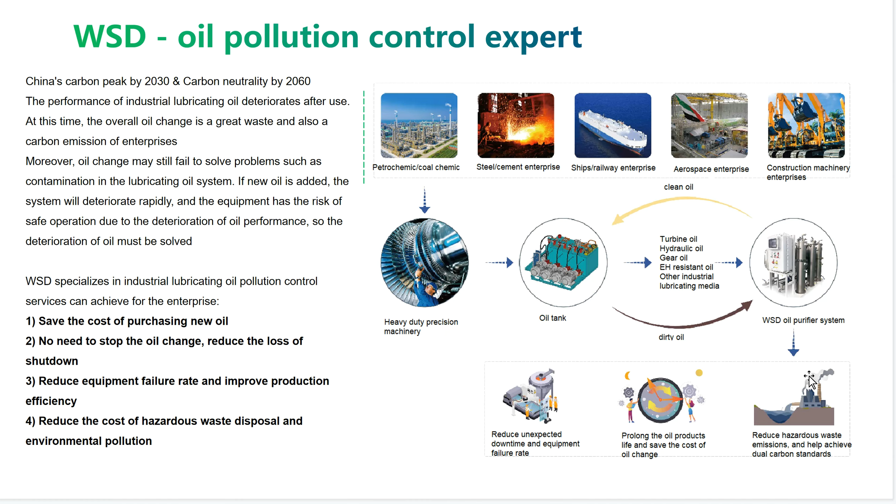First, let's see the formation and hazards of varnish. What is varnish? Varnish is a kind of coalescence, a kind of lubricating oil or hydraulic oil aging after composite oxidation at high temperature and high pressure. This is common in high-speed rotating machinery in lubrication and hydraulic systems.

These are varnish pictures: bearing bush, varnish on compressor gearbox, varnish on the tank wall. Initially, the surface is gold tawny, but over time, the surface is gradually covered with a darker rubbery coating, which eventually becomes a hard, paint-like substance.

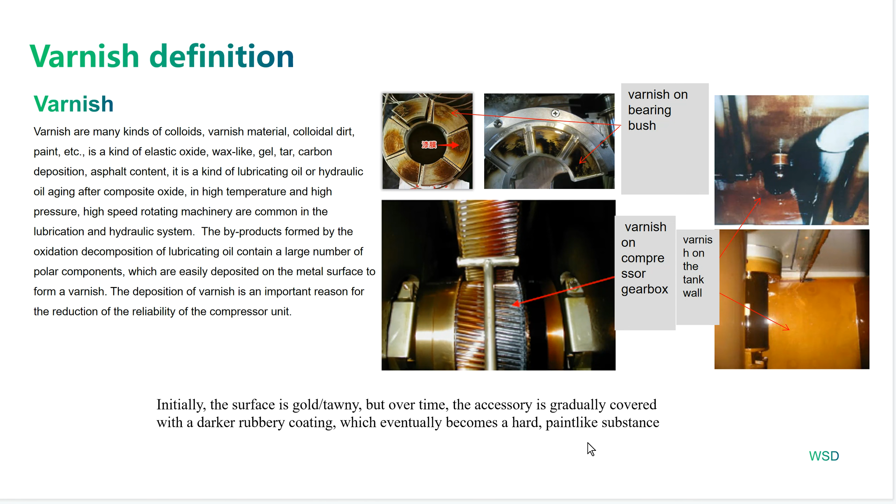Why is varnish easily formed in compressors? Because the operational environment is harsh and a hot spot effect is formed on the metal surface. Number 2 and 3 base oil alternative: number 1 class base oil, though thermal stability and oxidation stability, improves their solubility, and the oil microcombustion causes varnish formation.

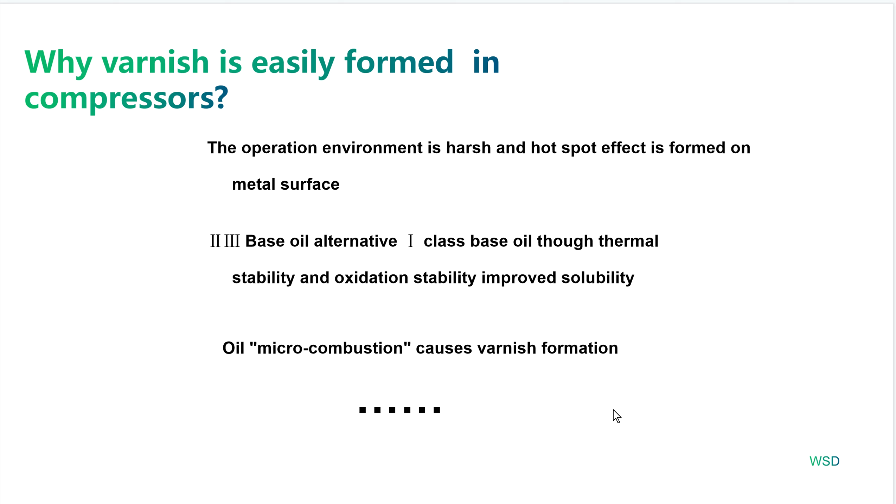Varnish has a feature of reversibility. The solubility of varnish will change with temperature. When the temperature is high, the ability of varnish to dissolve increases with the rise of oil temperature, and the varnish exists in the oil in a dissolved state, so the oil is transparent. When the temperature decreases, varnish dissolve ability becomes worse, and the varnish exists in the oil in a suspended state, so the oil becomes turbid.

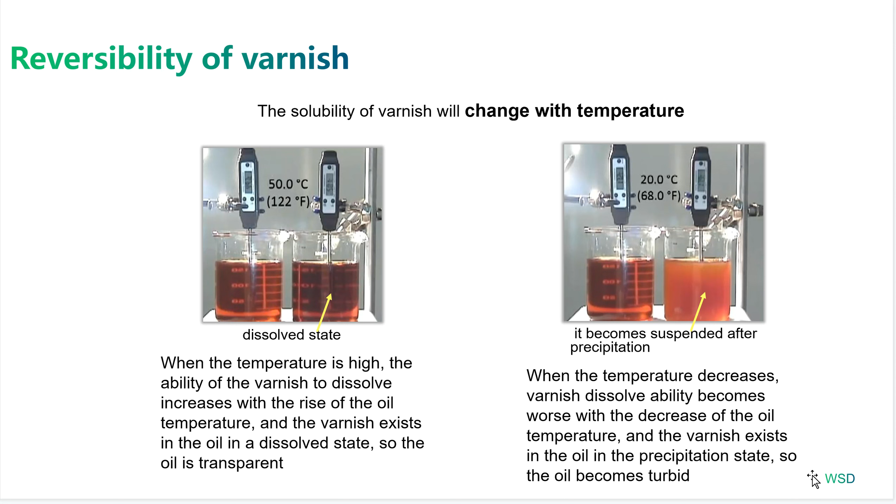Dissolved varnish and precipitated varnish, these two states will change with temperature. Separate charge adsorption technology cannot solve the dissolved varnish, and the unit will always be in uncontrollable risk.

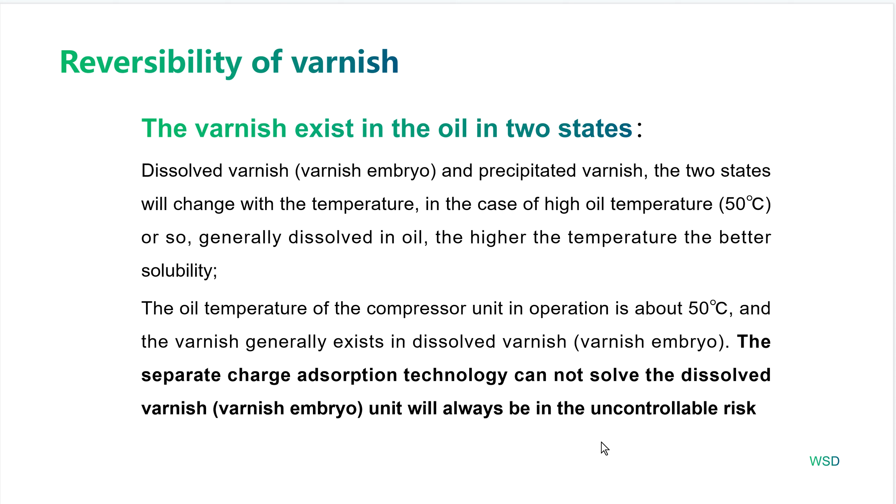The third picture is the filter. When the filter has varnish covering it, the filter's performance will be reduced, and you will need to change the filter in a short time. The number 4 is the cooler. When the cooler has varnish on it, the cooler's performance will be reduced.

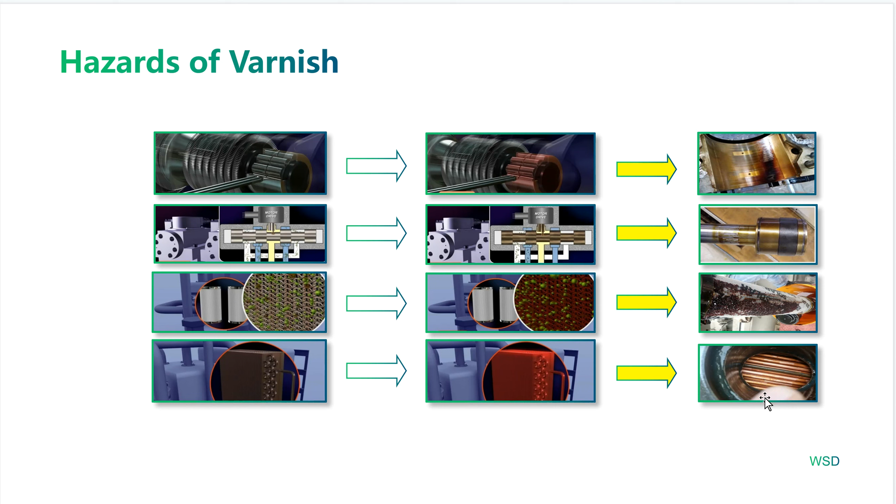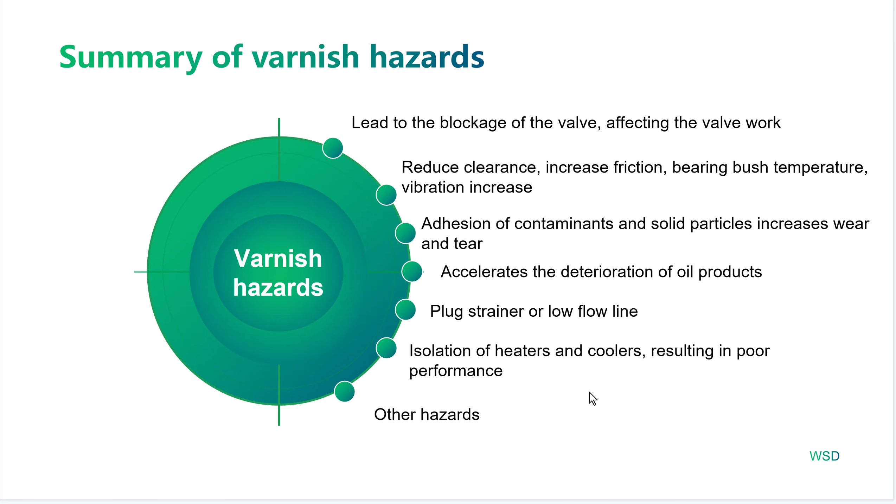Here is a summary of varnish hazards: leads to blockage of the valve, affects valve work, reduces clearance, increases friction, bearing bush temperature and vibration increase, adhesion of contaminants and solid particles increases wear and tear, accelerates deterioration of oil products, plugs strainer or flow line, isolation of heaters and coolers, resulting in poor performance.

Here is the testing for varnish. It's from ASTM D7843. This is a kind of colorimetric method.

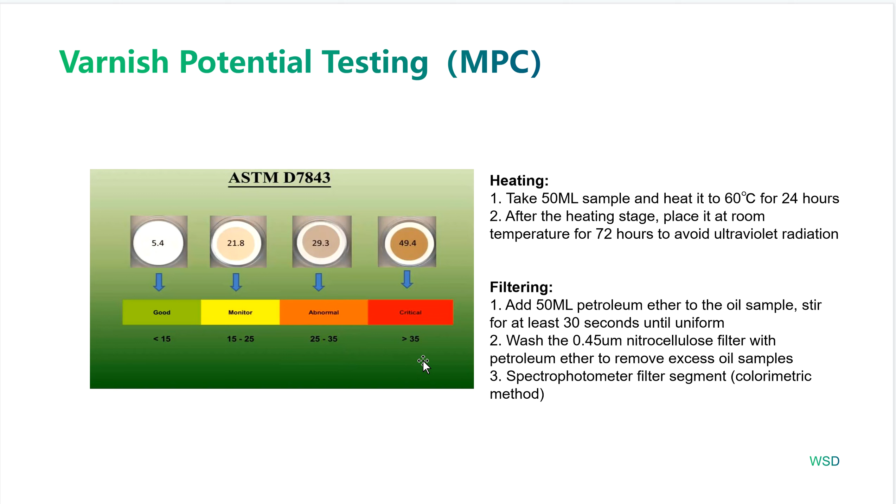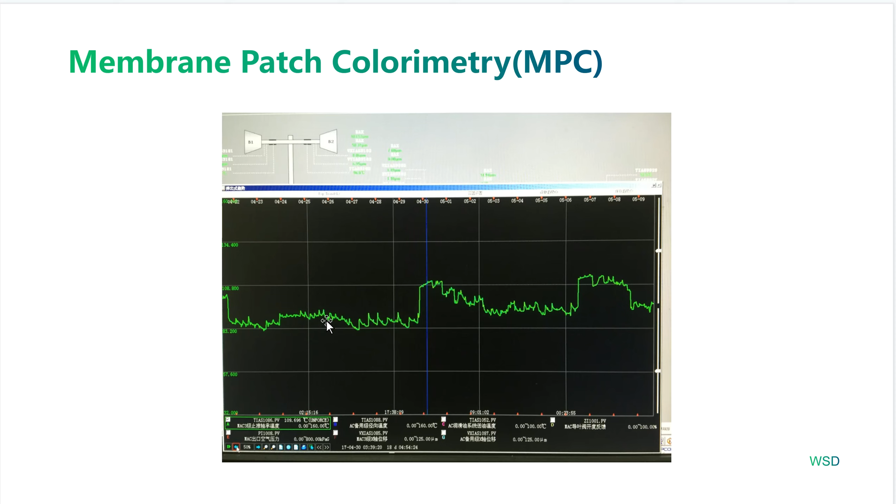These are the 4 different situations of varnish: when it's less than 15, it means it's good; when it's 15 to 25, it means the system needs to be monitored; when the MPC is 25 to 35, it means it's already abnormal; when it's more than 35, it means it's critical. When the rotating equipment has varnish, the temperature will fluctuate.

Number 2, we are going to introduce the varnish remover equipment, to monitor and detect lubricating oil varnish exists in the system.

This chart: the x-axis is the equipment running hours, and the y-axis is the varnish level. Turbine machine A and turbine machine B: turbine machine A has a serious varnish problem, so there are a few times it had shutdowns. But turbine machine B has very few varnish issues, so there is no shutdown for turbine machine B.

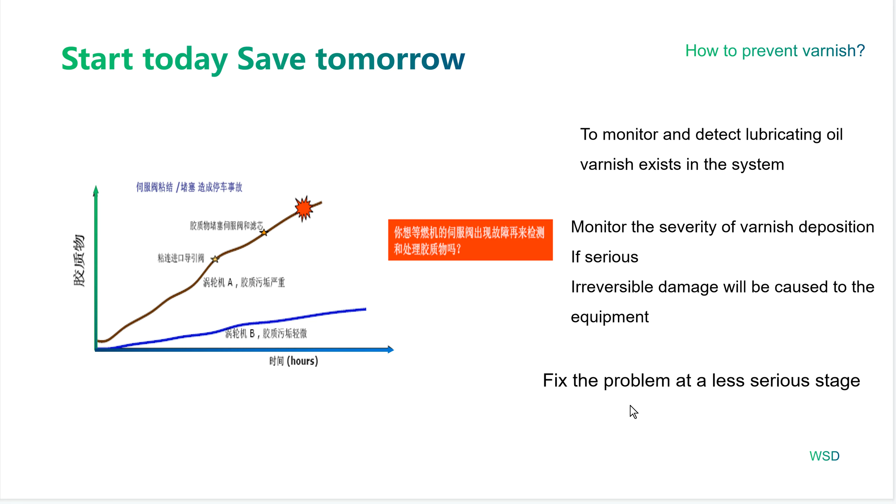So we have to fix the problem at the less serious stage. How do we deal with the varnish? We use electrostatic adsorption technology to remove suspended varnish.

Electrostatic adsorption technology makes use of circular high voltage electrostatic field to make pollutant particles in oil show positive and negative charges respectively. Under the action of electric field force, the positively and negatively charged particles swim towards the negative and positive electrodes respectively. Neutral particles are moved by a stream of charged particles. Finally, all particles are adsorbed on the collector, completing removal of contaminants from the oil.

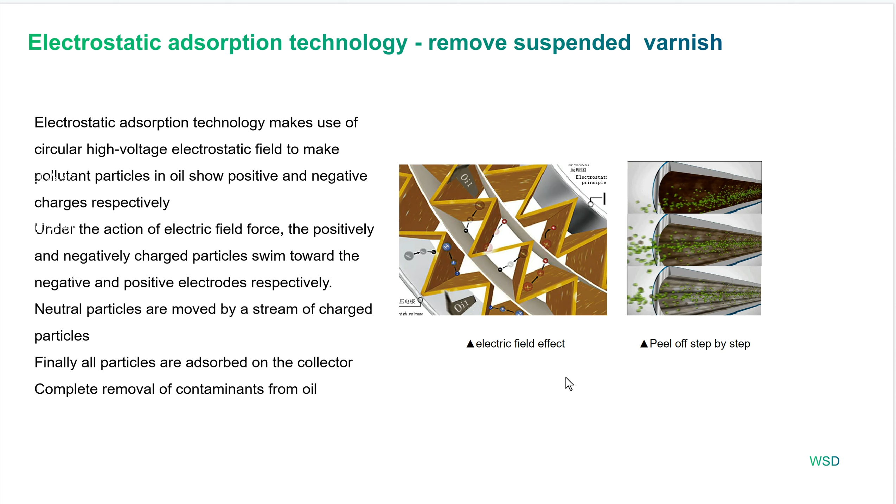And we use ion exchange resins to remove dissolved varnish. Using the abundant basic groups on the adsorption material, it can well adsorb all kinds of substances with acidic groups. The specially formulated resin gives the varnish embryo high affinity to the filter medium, so as to have a high removal rate of degraded products.

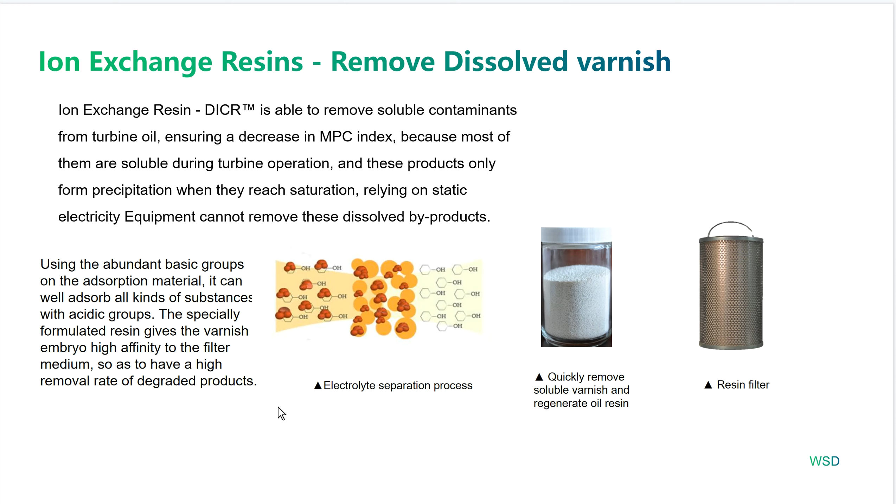Combine electrostatic adsorption technology and the ion exchange resin, we can not only effectively remove suspended varnish, but also remove the dissolved varnish.

Varnish has the feature of reversibility. When the accumulation of oxidation products increases, the dissolved state reaches saturation and is precipitated, suspended, and deposited as varnish. This process is reversed when the varnish is removed.

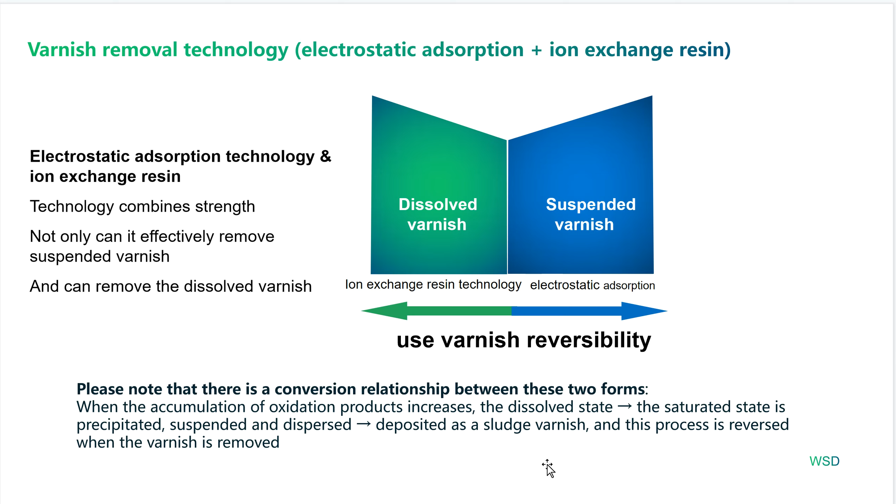What can be done when these two main technologies combine? It can reduce the MPC value to less than 15. It can peel off and remove suspended and dissolved varnish. And it can also improve cleanliness, keeping it below NAS number 5 for a long time.

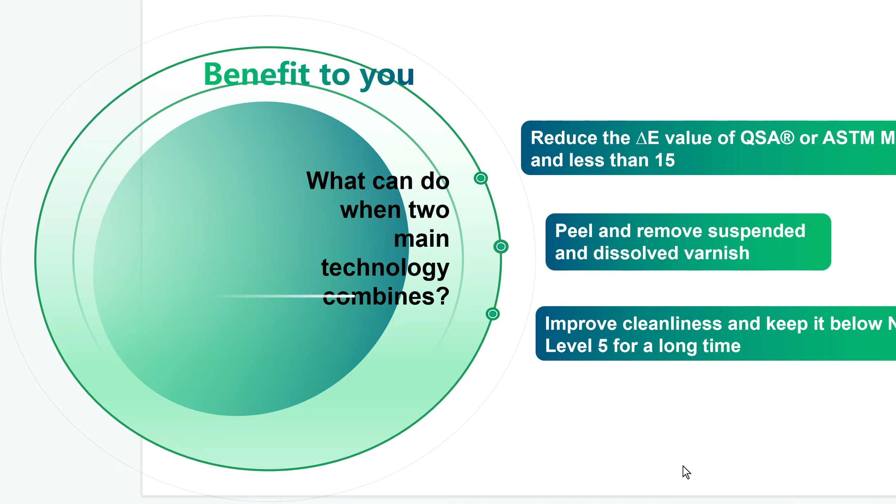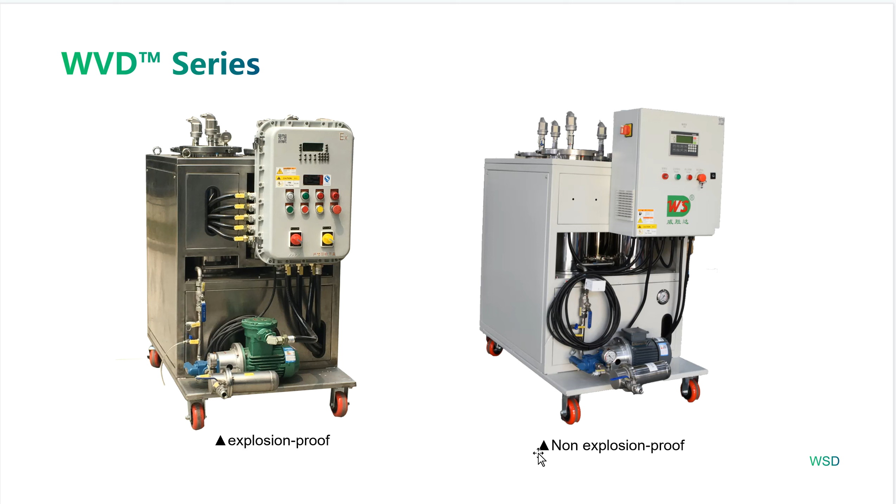Product advantages: WVD can quickly remove dissolved and suspended lubricant degradation products. It provides fast reduction and prevention of servo valve adhesion. It has a small footprint, simple and convenient operation, less maintenance, and online operation.

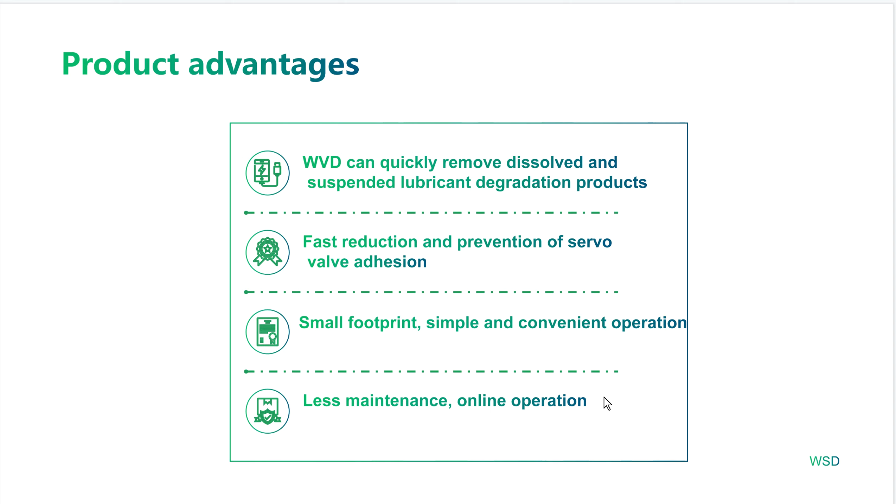Case share number 3. Case number 1 is an industrial gas group. The customer pain point: an air compressor in a Suzhou factory caused bearing temperature fluctuation due to varnish. The situation was serious, and the unit was forced to stop for maintenance.

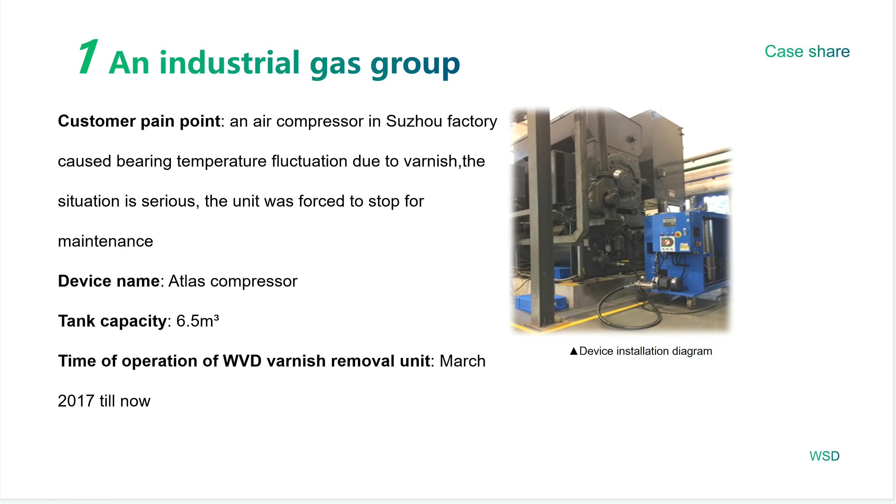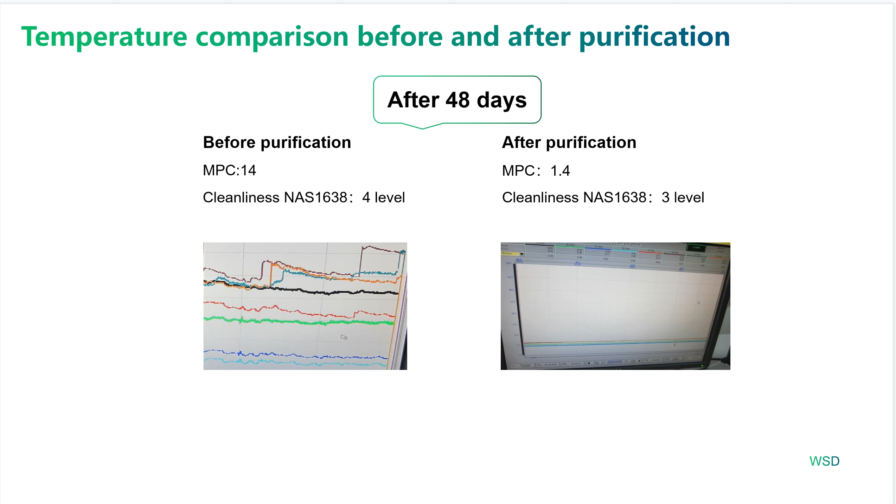Device name is Atlas compressor. Tank capacity is 6.5 cubic meters. It started to use from March 2017. After 48 days, MPC went from 14 to 1.4, and the cleanliness NAS 1638 went from 4 level to 3 level.

After 8 months of use with varnish accumulation, we can see the difference in the pictures. Before purification we can see clear varnish; after 8 months, the bearing bush is very clean.

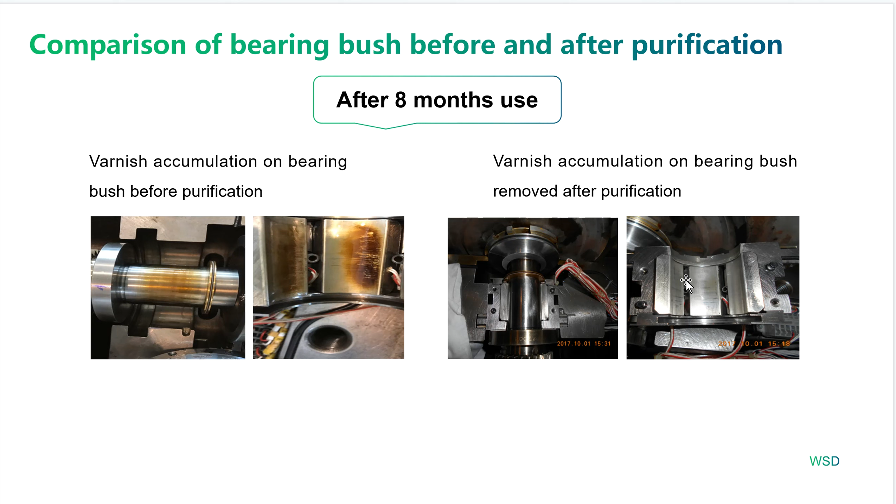Application effect in other factories of the group: after using our WVD-II varnish remover unit in Suzhou factories, the abnormal phenomenon of bearing temperature trend rising slowly also appeared in the Ningbo factory. After 30 days of using our WVD-II varnish remover unit, the abnormal phenomenon of bearing temperature was significantly improved. This is the data from the Ningbo factory, and we can see the results are also very good.

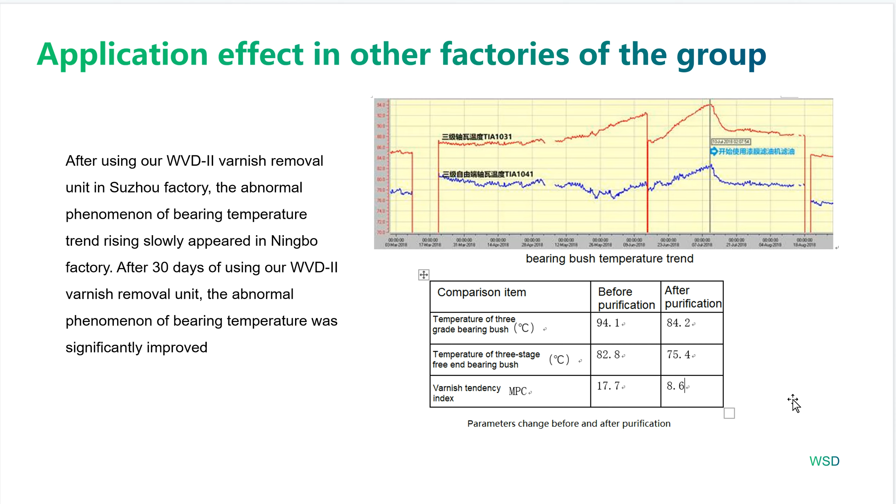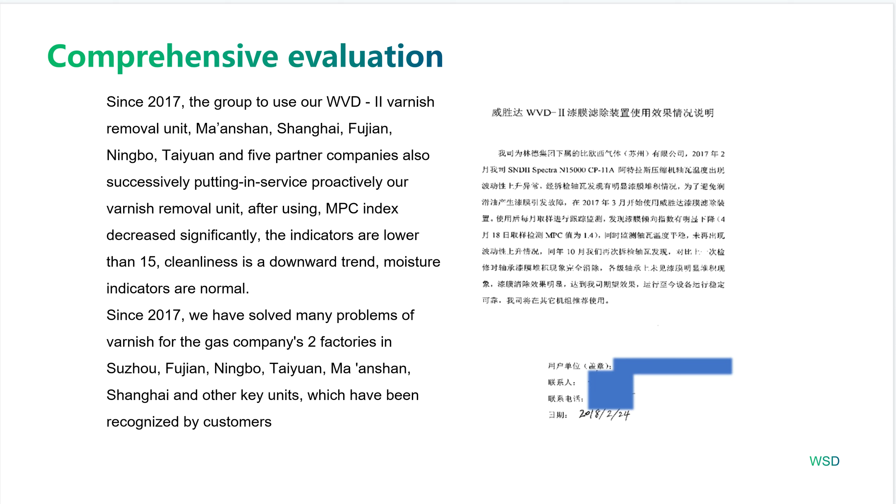Since 2017, the group has used our WVD-II varnish remover unit. The 5 partner companies in Ma'anshan, Shanghai, Fujian, Ningbo, and Taiyuan have also successively put our varnish remover unit into service proactively.

Case 2 is a large gas company. Customer pain points: the customer has a 43,000 large air separation compressor using a main turbine unit, with a thin oil station of about 48 cubic meters, using number 46 turbine oil.

MPC value was 21.2 when tested 36 months after startup, and rose to 24.8 when tested 44 months later, showing an upward trend, and there was varnish accumulation in the bearing bush during previous maintenance.

Device is a compressor, tank capacity 48 cubic meters. They started using our varnish remover unit from 2016.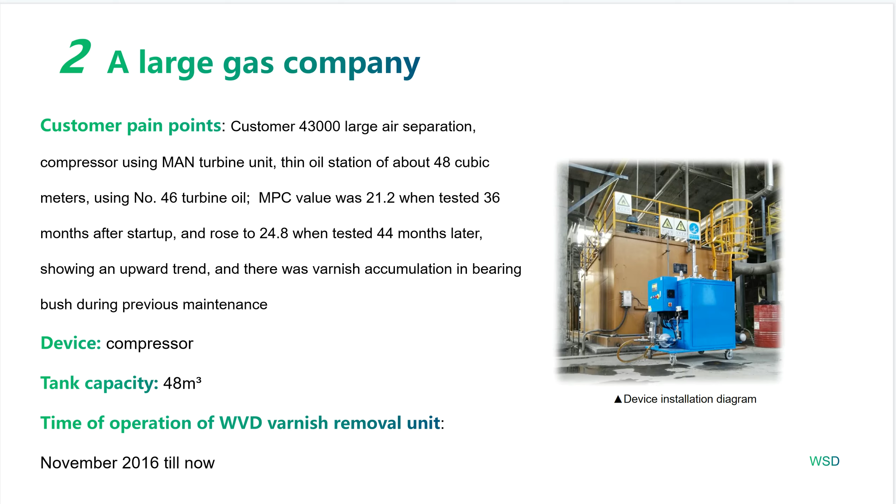Here is a chart from the customer. When the main turbine started up 23 months in, we can see the MPC is 9.5, and then the MPC is rising.

From here, when MPC reached 25, they started to use our machine, and we can see the MPC decreases in a very short time. But later, there is a rising stage.

Why? Because, as we said, varnish has the reversibility feature. MPC is testing the varnish in the dissolved state. When dissolved varnish is removed by our machine, the suspended varnish will reverse back into the oil, making the dissolved varnish increase, so MPC rises, but later MPC is reduced again.

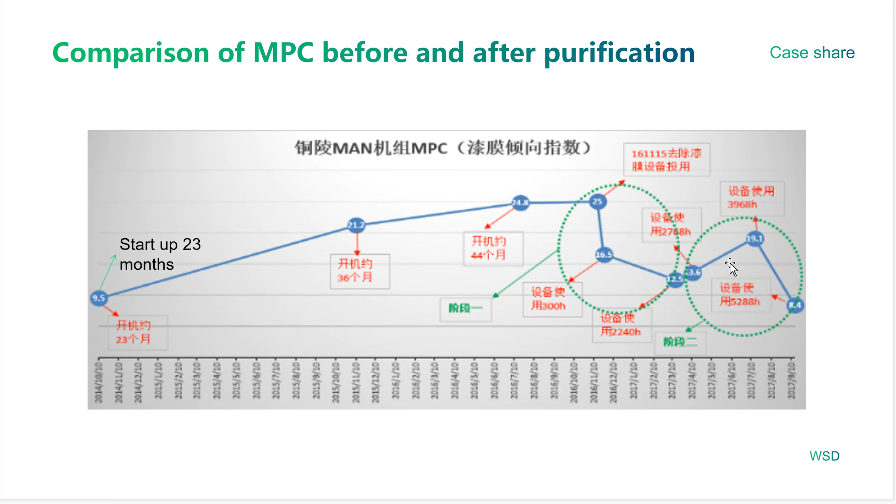So the trend is MPC up, down, up, down, up, but finally it will decrease.

Since the installation of the WVD varnish remover unit in November 2016, to October 2017 when the equipment shut down for maintenance, the varnish on the bearing bushings of the unit has been basically removed without any varnish accumulation, meeting the customer's technical requirements. Up to now, the varnish and other indicators are normal.

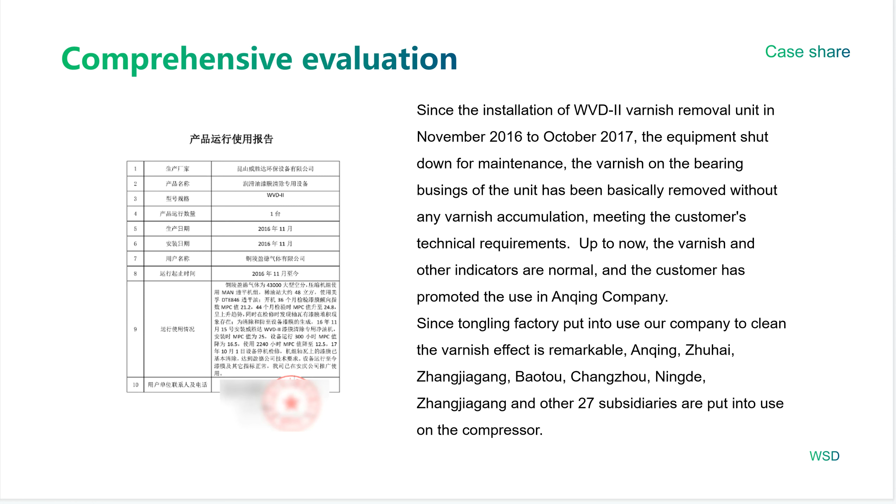The customer has promoted the use in the Anqing factory. Since the Tongling factory put it into use, our company's varnish cleaning effect has been remarkable. Other cities, 27 other subsidiaries, have also put it into use on their compressors.

Case 3 is the CNOOC company. Customer pain points: in September 2017, the bearing temperature for the supercharger slowly rose to 92 degrees, causing the risk of machine shutdown jumping.

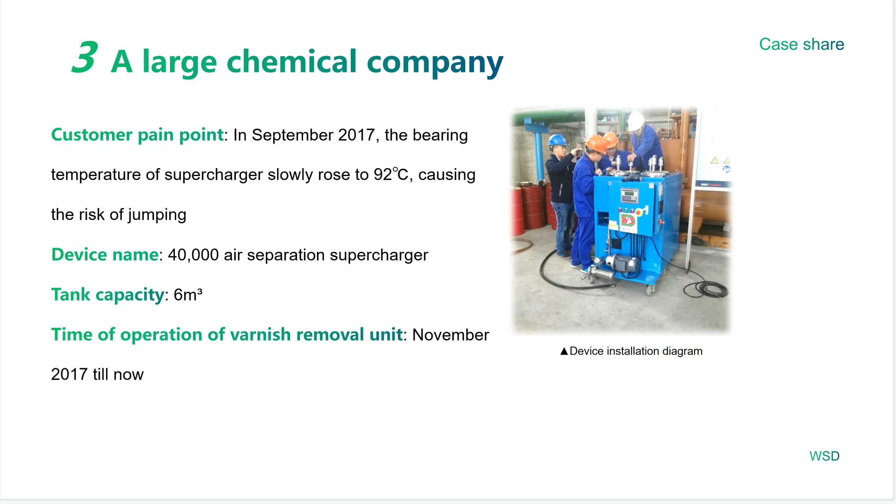Device name is the 40,000 air separation supercharger. Tank capacity is 6 cubic meters. Started to use from 2017.

Before purification: in September 2017, the bearing temperature of the supercharger rose slowly. In November 2017, the bearing temperature rose to 92 degrees.

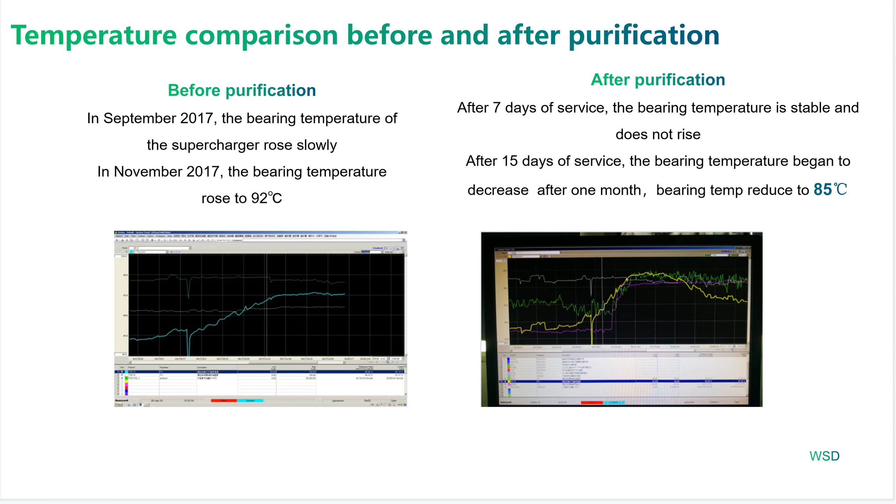After purification: after 7 days of service, the bearing temperature is stable and does not rise. After 15 days of service, the bearing temperature began to decrease after 1 month, reducing to 85 degrees.

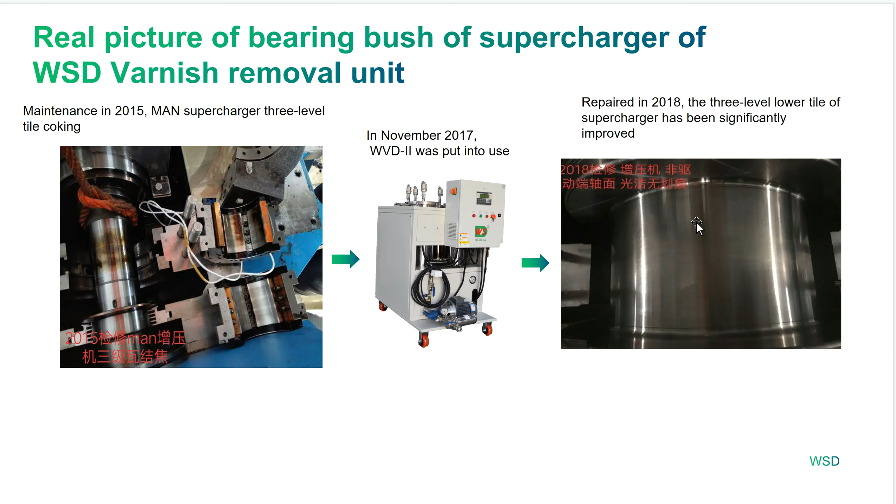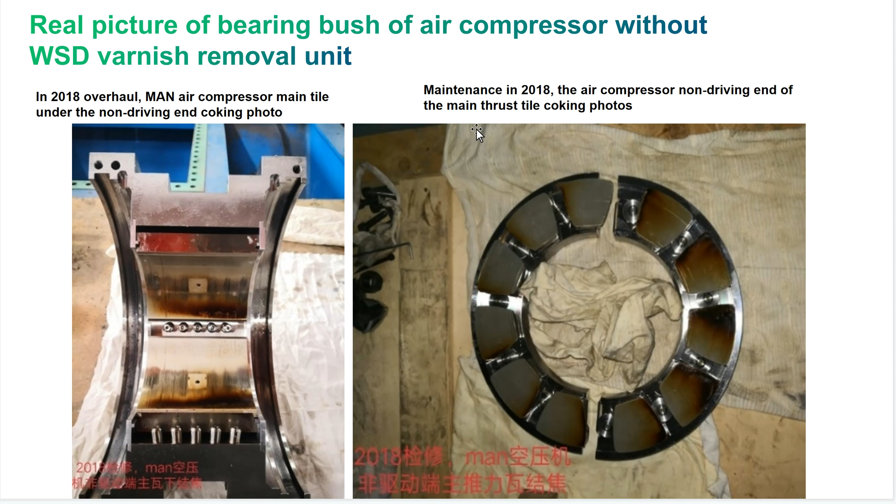In 2018 overhaul, MAN air compressor, main tile under the non-driving end coking photo. Maintenance in 2018, the air compressor non-driving end of the main thrust tile coking photos.

So from this picture we can see the difference. Supercharger.

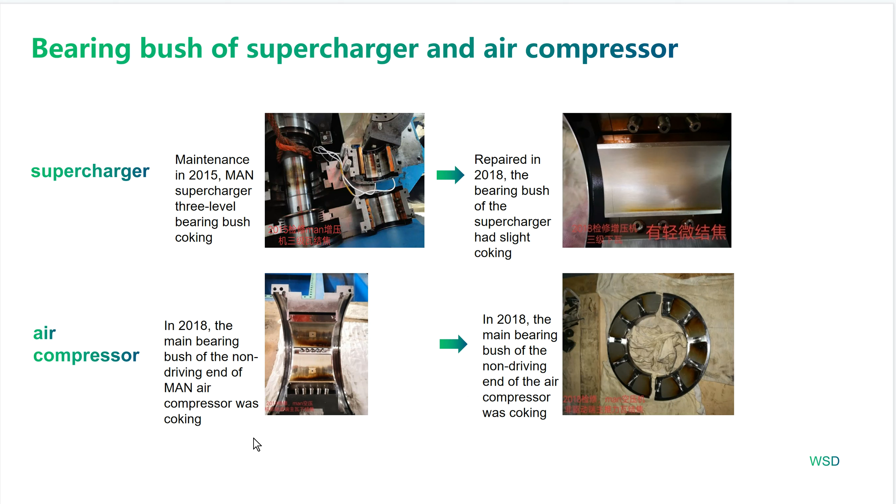Air compressor in 2018: the main bearing bush of the non-driving end of MAN air compressor was coking. In 2018, the main bearing bush of the non-driving end of the air compressor was coking. In December 2018, the customer found that the supercharger bearing varnish had been obviously removed during maintenance. Except the supercharger, other equipment doesn't use our machine.

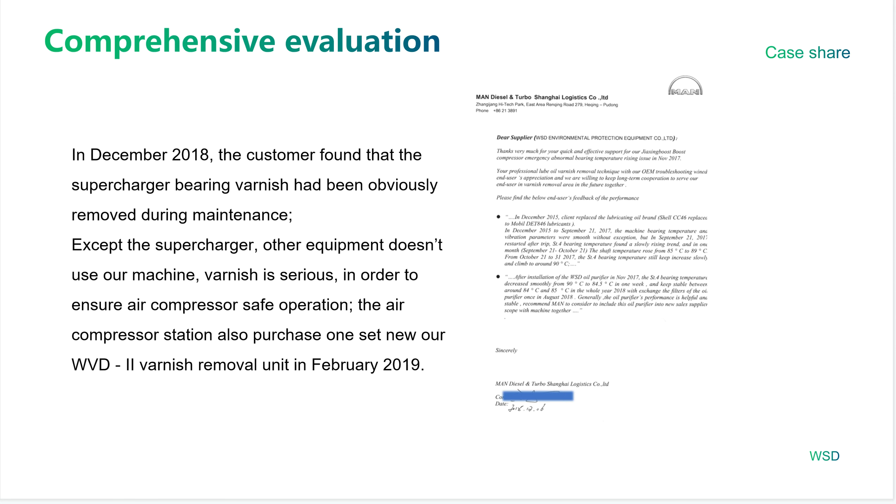Varnish is serious. In order to ensure air compressor safe operation, the air compressor station also purchased one new unit of our varnish remover in February 2019. This is a recommendation from MAN Diesel & Turbo Shanghai Logistics Limited Company.

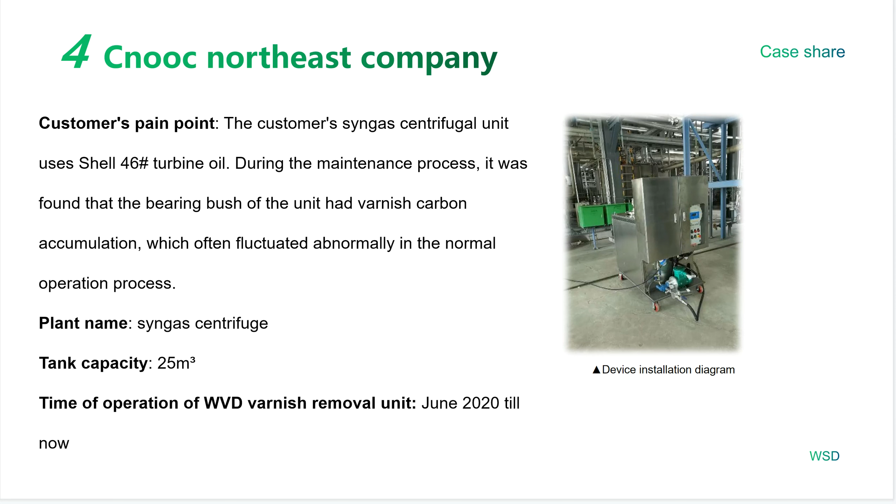Case 4 is Cnooc Northeast Company. Customer pain point: the customer's syngas centrifugal unit uses Shell 46 turbine oil. During the maintenance process, it was found that the bearing bush of the unit had varnish carbon accumulation, which often caused abnormal fluctuation in the normal operation process.

Plant name is syngas centrifuge. Tank capacity is 25 cubic meters. It started using from June 2020.

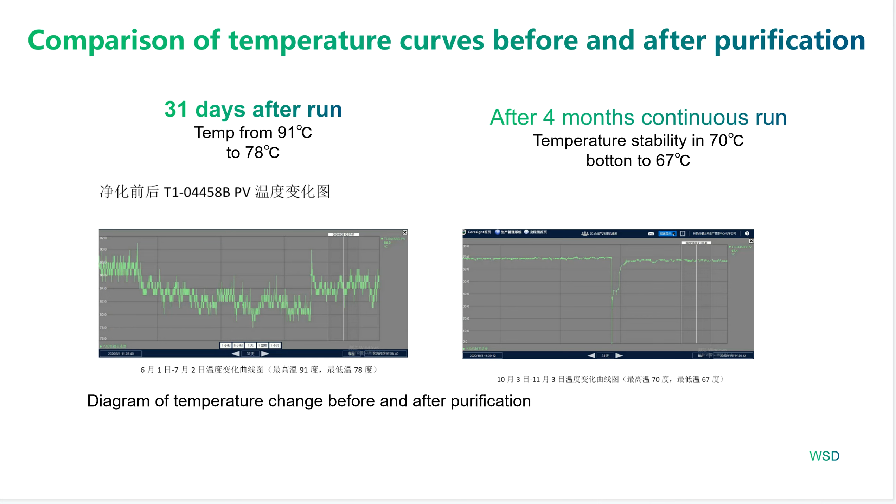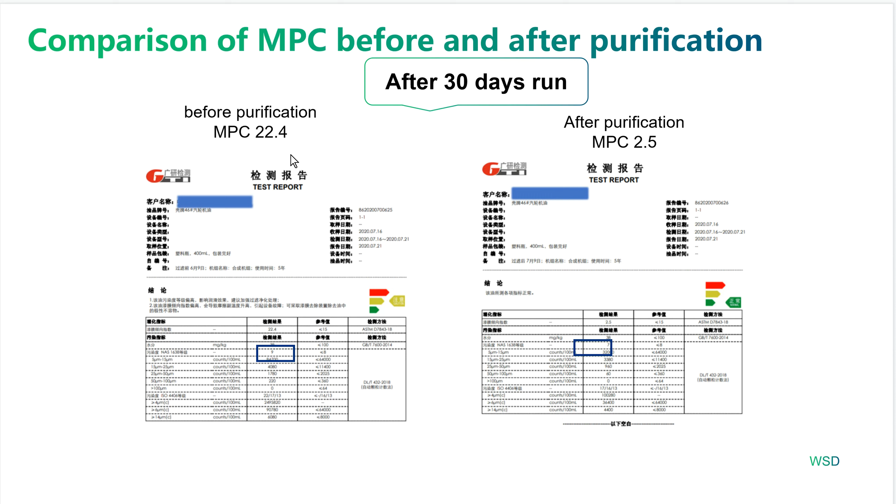31 days after run, temperature reduced from 91 to 78. After 4 months continuous run, temperature stabilized from 70 to 67 centigrade. After 30 days run, MPC went from 22.4 to 2.5.

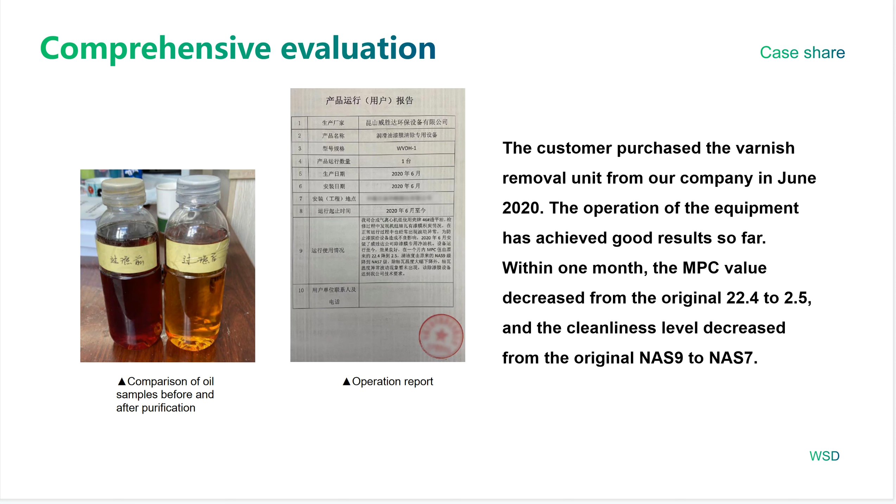The customer purchased the varnish remover unit from our company in June 2020. The operation of the equipment has achieved good results so far. Within 1 month, the MPC value decreased from the original 22.4 to 2.5, and their cleanliness level improved from the original NAS 9 to NAS 7.

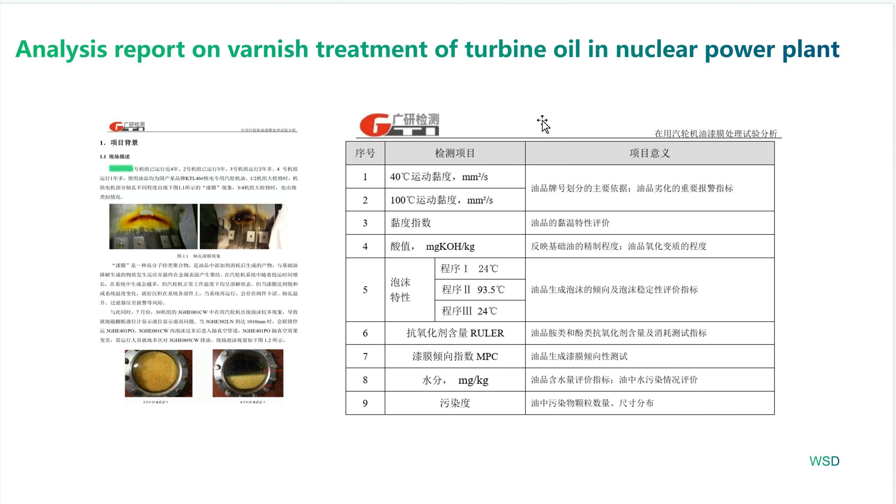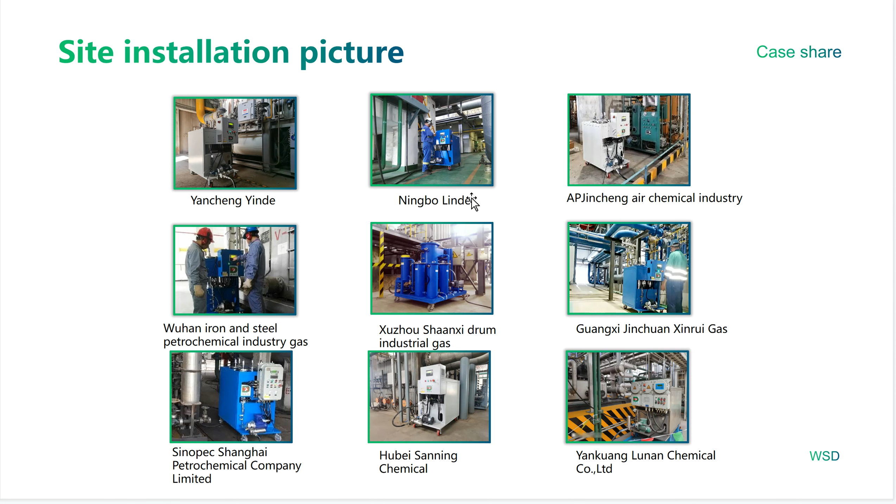Analysis report on varnish treatment of turbine oil in nuclear power plant. This is some result comparison. These are some site installation pictures. Partial customer reference.

Air separation: many Linde air products and some subsidiaries, petrochemical, coal-chemical industry, and other big group companies.

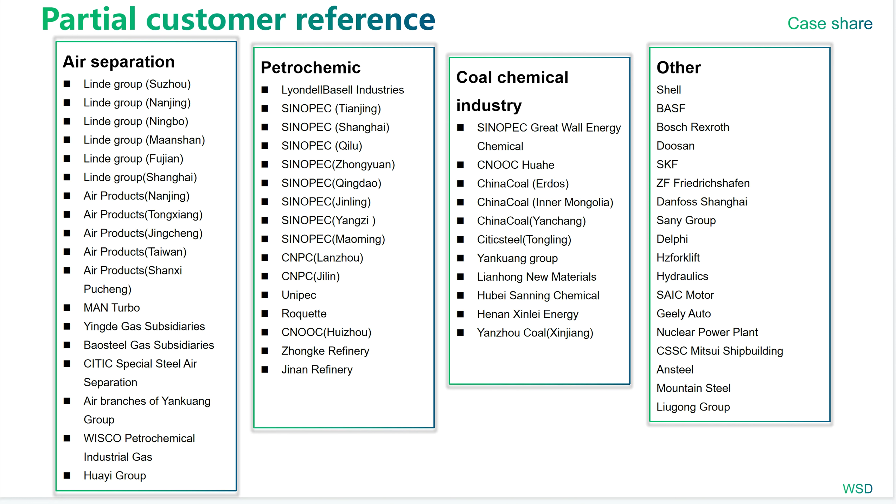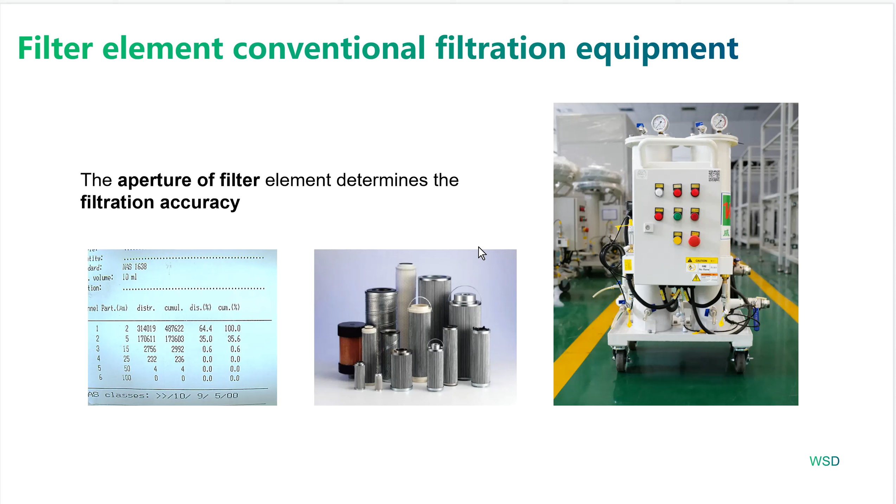Number 4: we are going to introduce the cleanliness abnormal solution. The aperture of a filter element determines the filtration accuracy. This is our oil filtration cart.

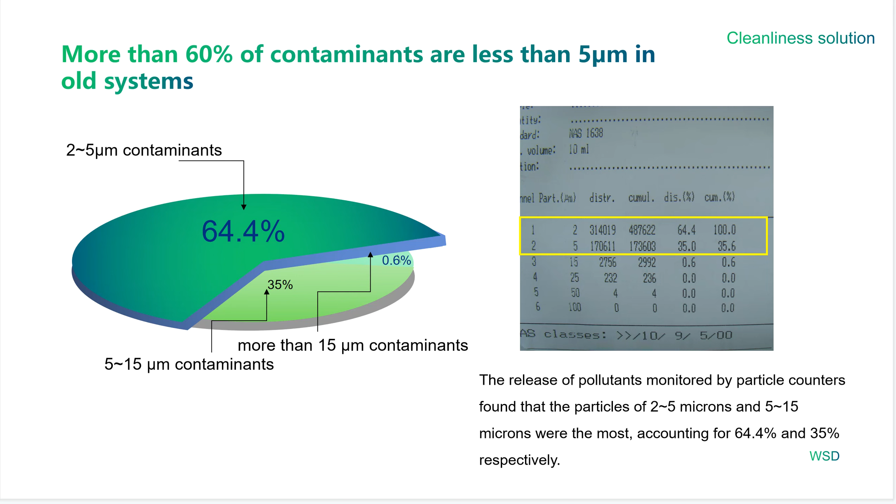More than 60% of the contaminants are less than 5 microns in old systems. The release of pollutants monitored by particle counters found that particles of 2 to 5 microns and 5 to 15 microns were the most, accounting for 64.4% and 35% respectively.

So how do we deal with these small particles? We use the balanced charge purification technology.

The positive and negative electrodes are placed in 2 paths in the non-conductive fluid to charge the particulate pollutants in the fluid. One is loaded with positive charges, the other with negative charges, and then the oppositely charged electrodes attract. The particles remix, attract each other, and accumulate into agglomerates.

The size becomes large, so that the small particles, which are not easy to filter, become easier to be removed by filtration. So the basic principle is to make small particles become large, so make it easily removed.

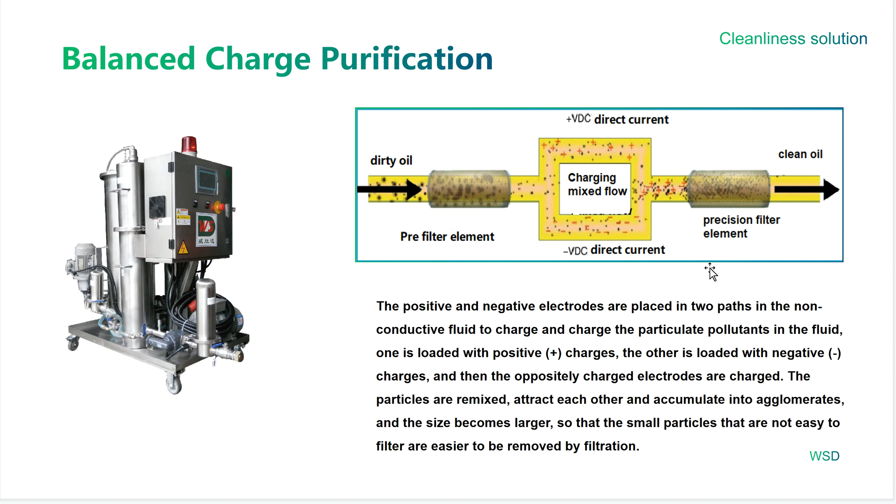Working principle of coalescence and separation. Coalescence: the free water in the oil is coalesced into large droplets after passing through the coalescing filter element. Separation: large water droplets are blocked on the outer surface of the filter element and settle to the water storage tank by gravity.

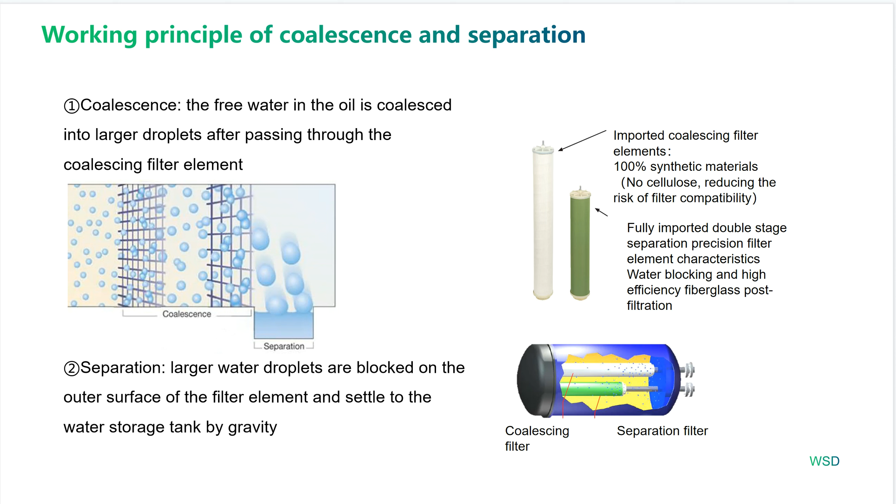A coal carbonization company. Customer pain point: customers' new units need to be equipped with an oil purifier to purify oil products.

Device name is a domestic Shaanxi drum compressor. Tank capacity is 8 to 9 cubic meters. Started to use from June 2021.

Cleanliness before purification is NAS 11. After purification it is NAS 6.

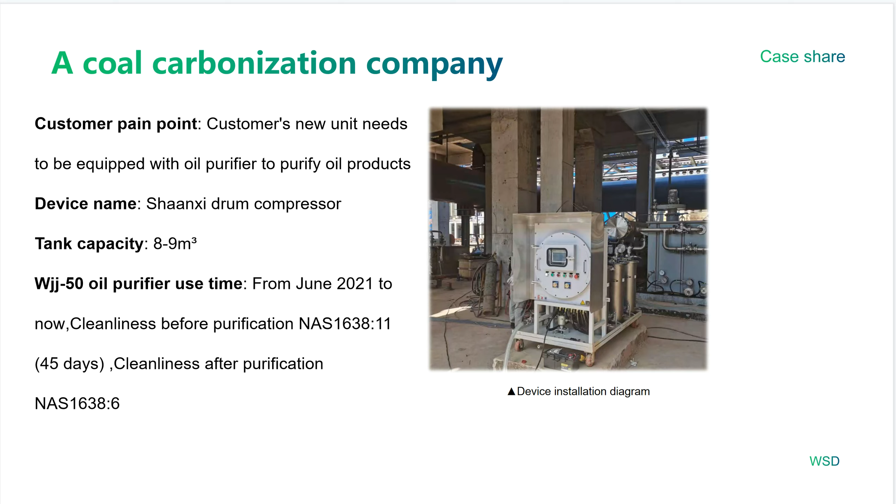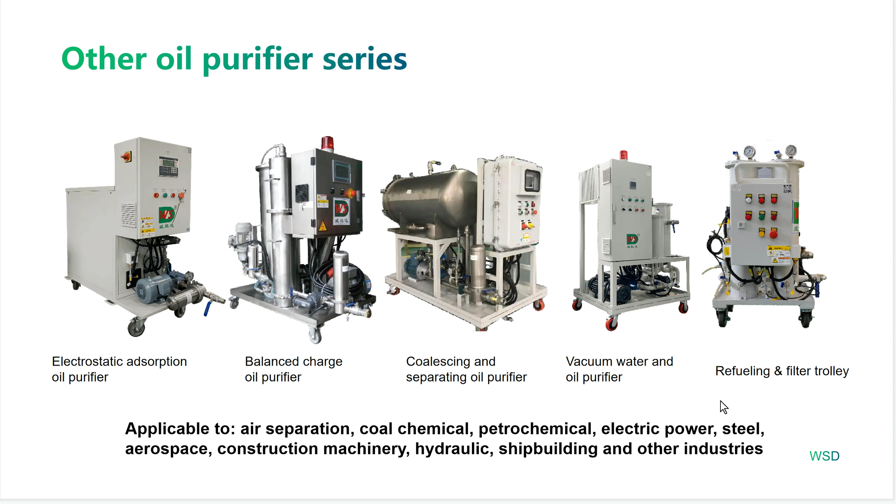Here are other oil purifier series: electrostatic adsorption oil purifier, balanced charge oil purifier, coalescence and separating oil purifier, vacuum water and oil purifier, and refueling filtration.

Brand introduction. WSD focuses on development of industry oil purification equipment. We were founded in 2009 and we develop very fast.

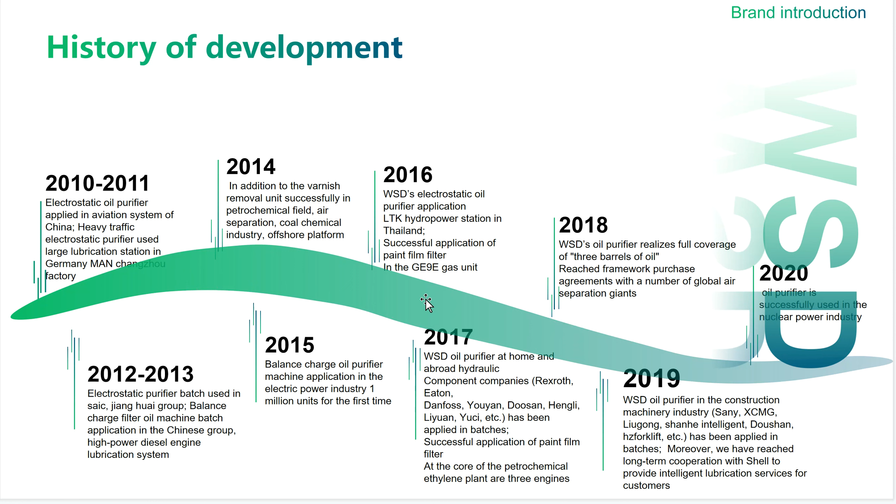Almost every year we have a new patent or new application area. We have more than 2,000 global customers. 1 in every 5 top 10 global companies selected WSD. 5 core patents to break the foreign technical barriers and markets.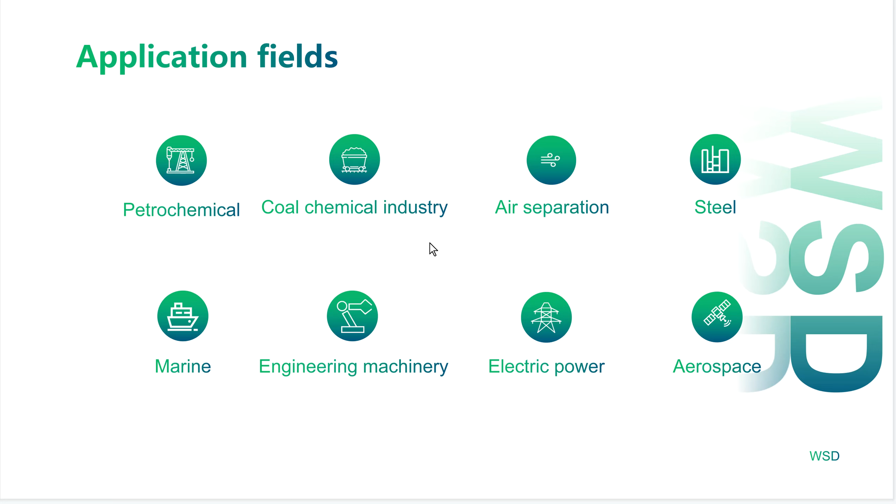Petrochemical, coal-chemical industry, air separation, steel, marine, engineering machinery, electric power, aerospace.

What does WSD sell? We say clean fluids. We are a provider of reliable technology. We are customers' technical partner. We are a pollution control consultant.

So we will help you in 3 steps: set oil pollution control targets, choose the appropriate filter tool, and monitor oil indicators online or regularly.

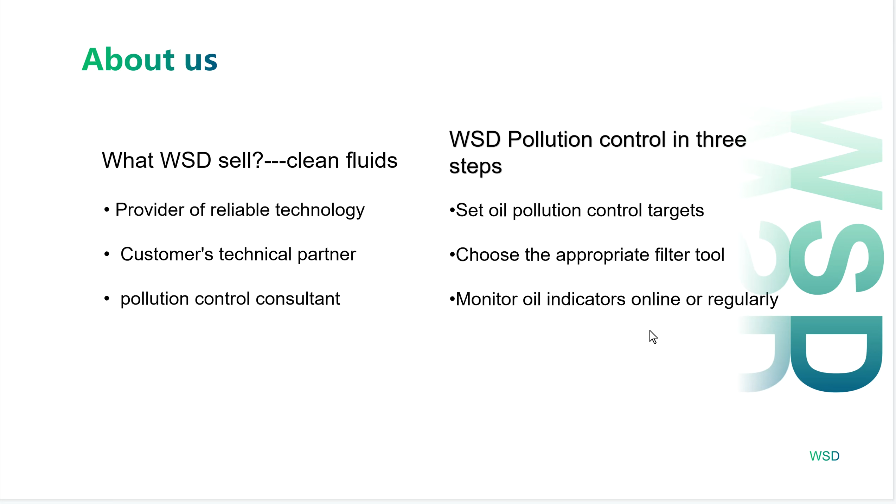All the achievements we made today start from our uncompromising stance.